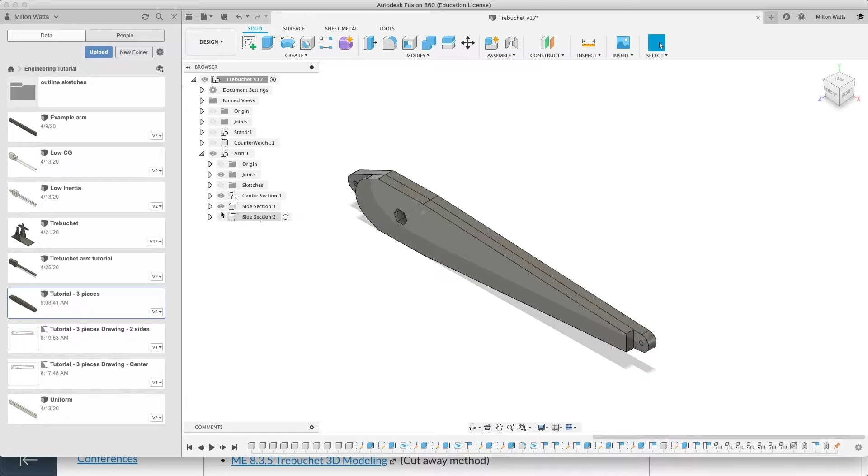In this drawing, I have 3 components, which I'll hide one at a time. I've got a center section that can be laser scribed, with all features as a single outline. On the side, there's another section, a little smaller, where some features don't go through. The third one is a repeat of the second, so I've got a center section and 2 side sections.

We're going to go through how to do that from scratch. Before I jump in, let's look at the requirements for this project. We need to fit dimensions of 10 by 1.5 by 0.75 inches.

That's 3 layers of hardboard cut from a laser scriber. There's a bearing, a 0.375 inch hex coupling nut threaded onto a 1/4 inch bolt with a little grease, which makes a wonderful bearing. We need provisions in our design for hanging the weight, attaching a sling, and a release pin, and we need to make sure all those features appear on our design.

That's all the canvas work we're going to do. The rest is in Fusion 360, which hopefully you have installed and have learned the basic features. So in this one, we're going to start clear from the beginning.

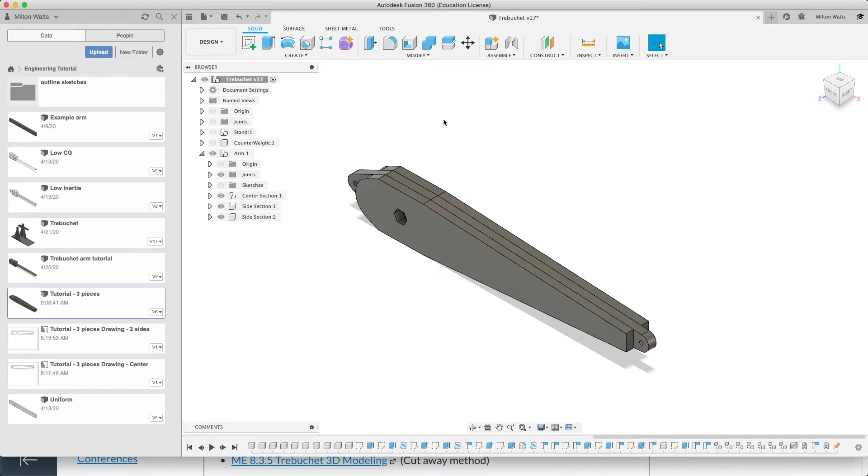We're going to create a new design. The first thing I like to do is save it and give it a name. This is a trebuchet tutorial, and since we're doing a laser cut design, I'll note that in the title.

Our design actually has 3 separate components, so we'll let the design itself be an empty parent with nothing physical in it. I'll right click with this selected and create a new component, renaming it by slowly double clicking - we'll make this the center section. Then I'll right click again to create a second component, part of the major design, which we'll call side.

So we've got a design with 2 subcomponents, center and side. We're going to start with the center, and to work on it, when you have multiple components, you have to activate the one you're working on. With that activated, we'll create a sketch.

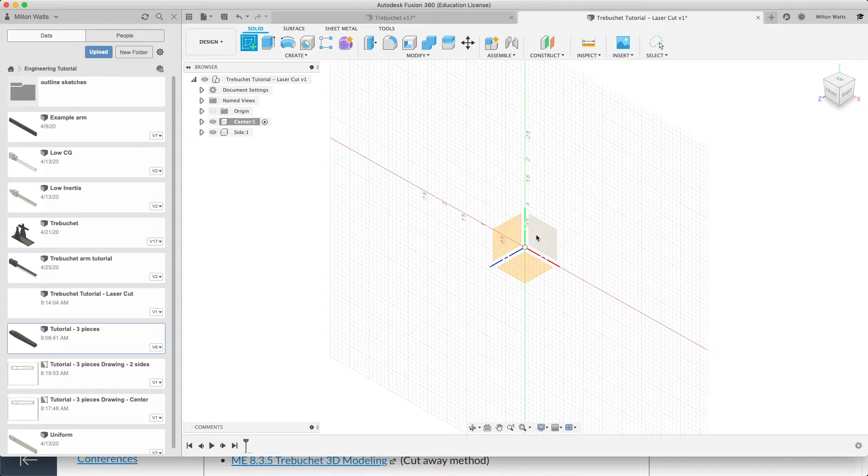We'll put that sketch on the XY plane, and work from the center out, from the pivot point outward. The reason we do that is it makes the math a lot easier when getting numbers to send back to our model.

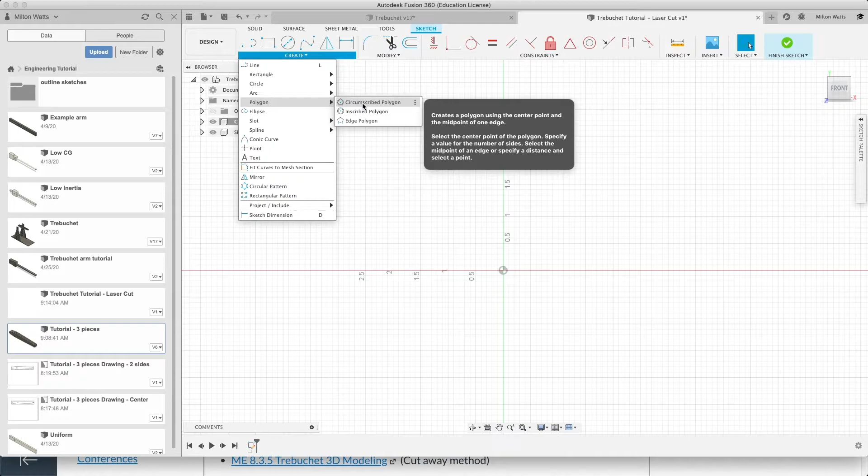So go to the Create menu. I'm going to start with the polygon right in the middle, using a circumscribed polygon - that means the dimension of your circle will be the flat dimension.

I'll click here and pull straight down so it stays horizontal on the bottom, then click. The actual size of this is 0.275. I'll use the dimensioning tool to dimension from the bottom to the top flat, and right now it's sitting at a little over 1.5 inches.

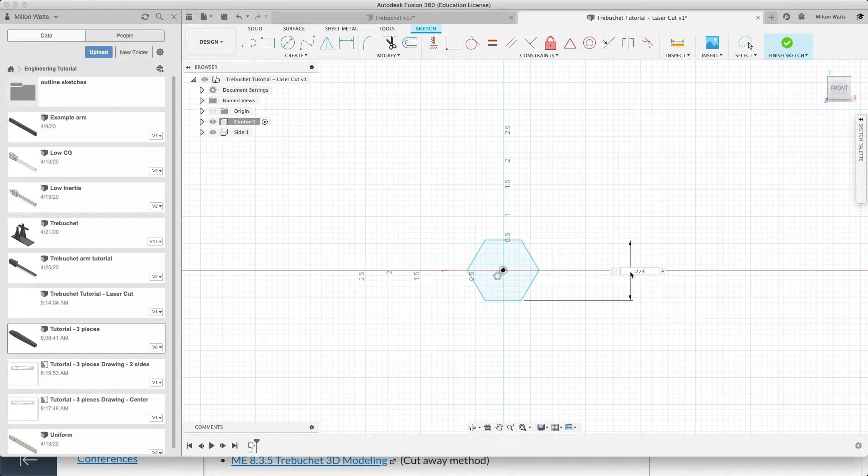The actual part is 0.275. I'm going to make it slightly smaller than that, because the laser scriber removes about 5 thousandths of material, and we want a nice snug fit. So 0.273 is the size I'm making it.

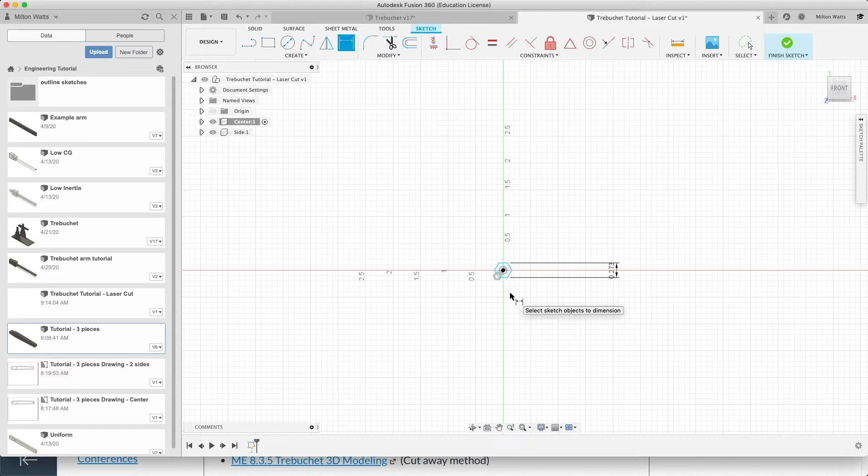By the way, if you're 3D printing that, you'd go slightly bigger because the material oozes out. Notice it's not the dark black line yet - that's because we're not fully constrained. If I select the horizontal vertical constrain tool and click on that surface, the hexagon becomes fully defined. I know its center, its size, and its orientation.

So there we go, that's done. Let's zoom out a little bit here. I'm using my touchpad to zoom out, but you can use these menu items down here as well.

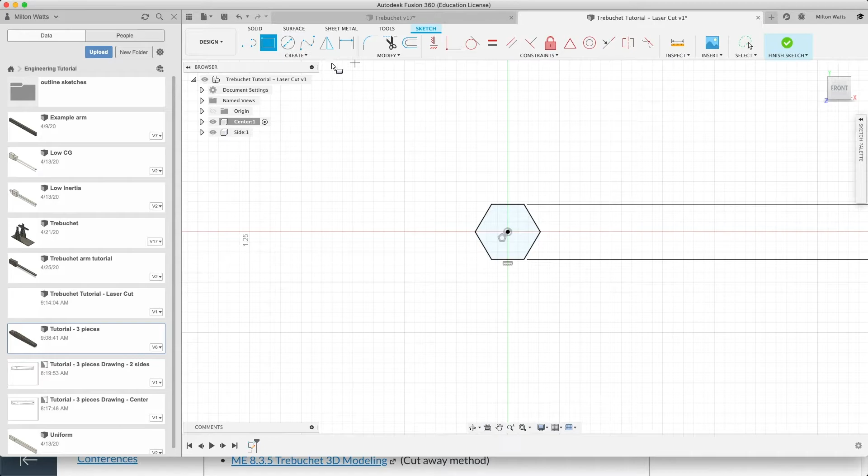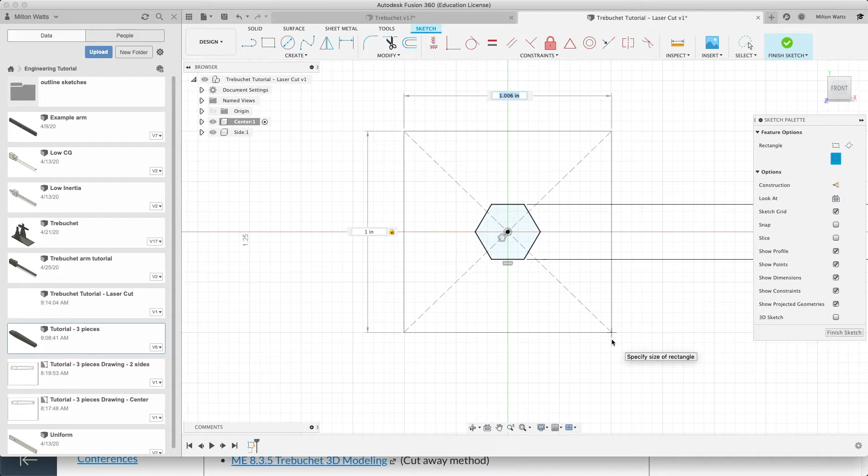Now I need to put some shape around that. I'm going to do a simple square. If I hit create rectangle, my palette gives me the option to do a center rectangle. If I click on the center and come off to the side, it creates a rectangle in both dimensions. For simplicity, I'll type 1 inch, hit tab, type 1 inch, hit return, and I have my fully dimensioned rectangle.

The rest of the design I'm going to build from this. I'll need a couple of construction lines for the rest. Zooming way out - my entire part is 10 inches long. I want a 2-inch short arm and an 8-inch long arm in this design, for a total of 10 inches.

I'm actually going to do some construction lines, and I'm going to put a line just along the axis here.

So I click in the center and draw out this way for a ways. Did that do it? No, I forgot my line tool. There we go. So I'll start on this axis and just do a big horizontal line, much longer than my part is going to be. And then I'm going to do 2 vertical lines. Hit the line tool, I'm going to put one at about 2 inches and the other one, hit escape to finish that one.

Another vertical line down here somewhere, and we'll just dimension, put those exactly where we want. Dimension tool, click from this line to the middle, and that one's showing at 7.5. We'll make it 8 exactly, and we'll dimension from this line to the middle and make that 2 exactly. Now I'm going to zoom extent here and hide my sketch palette, or move my sketch palette.

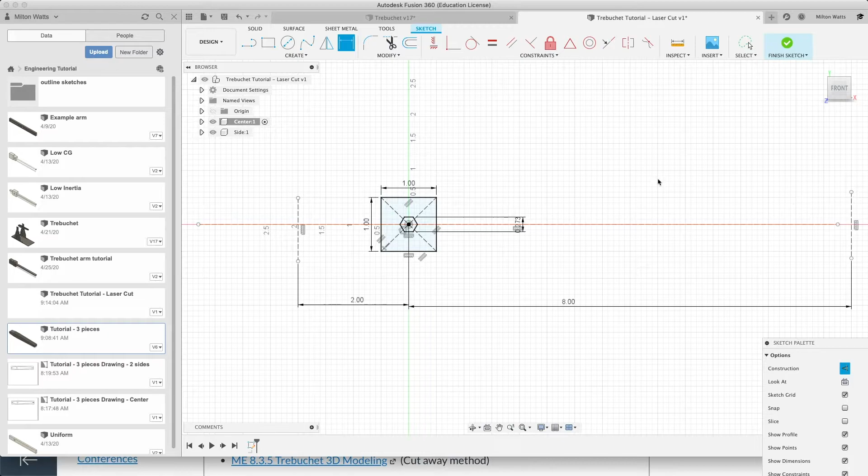There we go, we can see the whole part. It's going to fit within that area. All right, so now we've got that dimensioned. We can start filling in this space here.

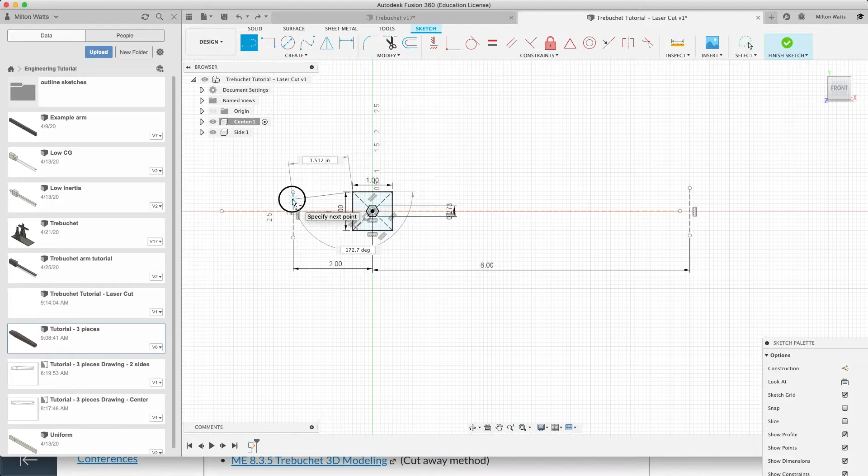Let's just make a very simple trapezoid, so 3 lines. So if I create a, just take the line tool, go from here, come out over here somewhere a little bit below the horizontal, over here and over here. That created all but the end line. Let me make that end line. Okay, and it's thinking about it, and there we go. We've got these three lines.

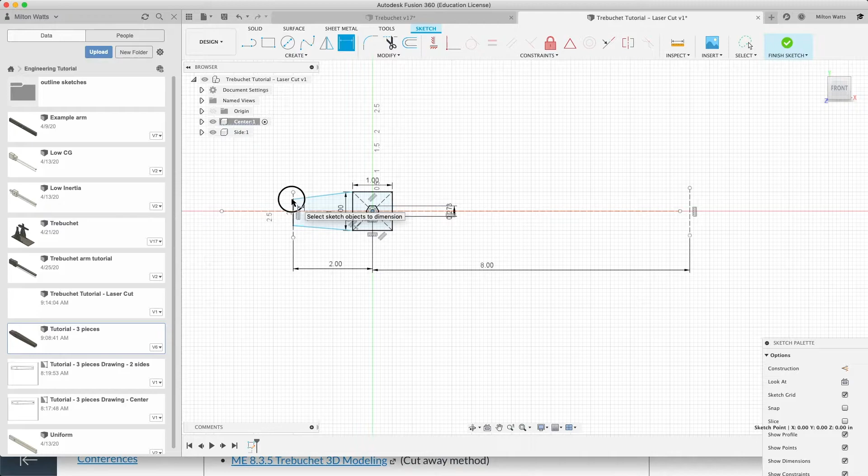These aren't fully dimensioned, it'd be nice to give them some angle, so let's measure this point relative to that point in the vertical direction. So I'm going to come in with the dimension tool, come from here to, oops, I clicked wrong, to that point, and to the origin. No, it really doesn't want to dimension that for me. There we go, 2 inches.

So I don't want to measure 2 inches that direction, I want to measure the height. So I get down here between them and click that. Let's make that a 1/4 inch.

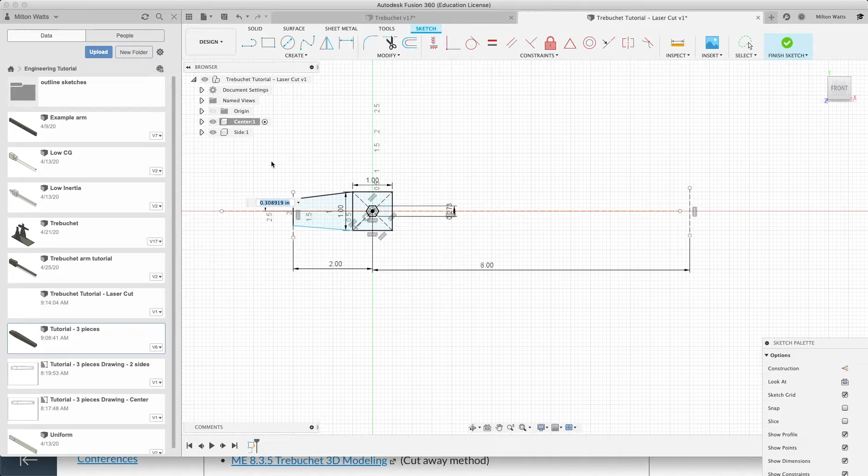And then do the same thing here, measure from that point to the origin and come in here. Sometimes it fights you on doing that. If you right click, you can actually force that to be a vertical dimension. And it's at 0.309, let's say change that to 0.25. There we go, now we've got this fun little trapezoid shape, and it's fully dimensioned.

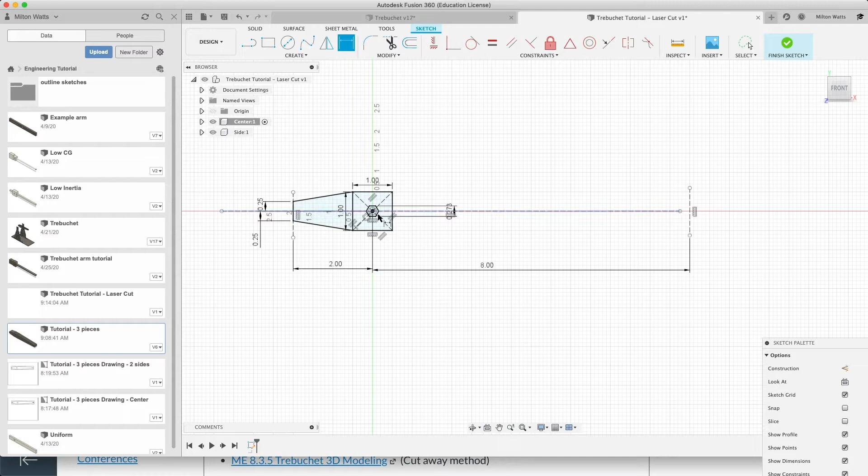At this end, we need some sort of hole, so I'm going to zoom in. That was a little too much. Pan across, and maybe somewhere in here we need a circle, so I'll come in, click on that line. I found that about 1/8 of an inch is good, so I'm going to make this hole 0.125 for threading things like wires through. That's just sitting on that point.

Don't know how far it is from here or here. Let's measure from here, put it maybe 1/2 inch in. So the dimension tool, measure the center of the circle out to the back of the part. Cancel, the center of the circle to the back of the part. And there we go, it's sitting at 0.187.

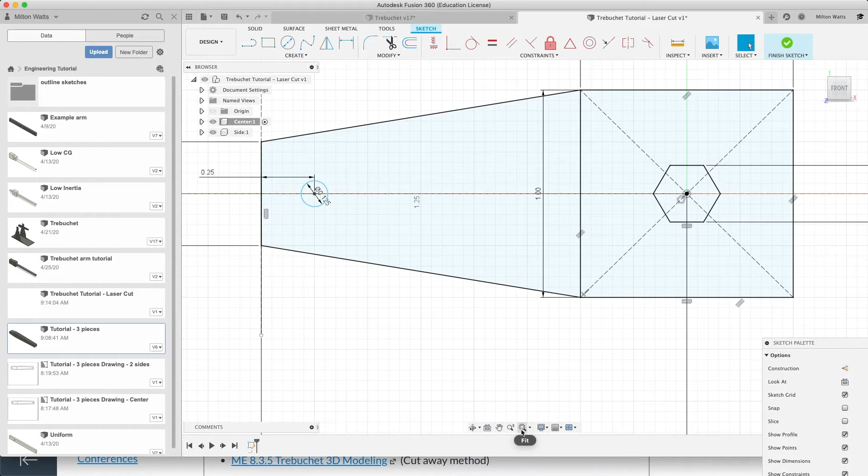Let's put that in maybe 1/4 of an inch, so that we're still here where it's pretty beefy. Okay, we'll call that done for that end. Let's zoom the extent here, zoom to fit so we can see this end, and then zoom in over here.

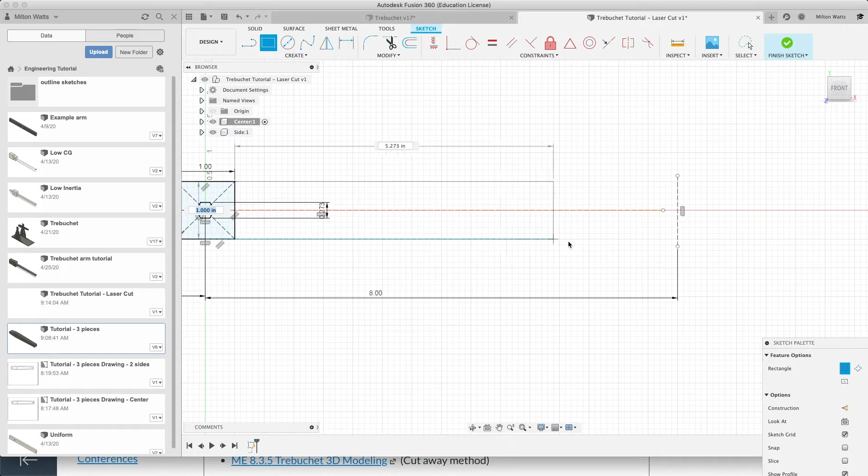Now we need to be able to see the... For this side, I think I'm going to make it a little bit simpler. We're just going to go with a pure rectangle, just a 2-point rectangle. Come to this top left, top right corner, and then come down here. I want to be exactly that height, and then we'll come over till we hit that line. And there's a nice simple rectangle that is the correct dimensions, 8 inches.

This line here didn't register on that point, so I'm going to hit the dimension tool, measure from here to here, and let's confirm that that's 1 inch, and that's fully dimensioned.

Now we need 2 more features. We need a hole at this end somewhere. I'm going to go ahead and drag this point out off my part. And I need a hole down here, and then I need some way to attach the release pin. First, let's do the hole.

So I'll come in here, maybe about a 1/2 inch from the end, draw that same 0.125 hole. Let's dimension it 1/2 inch in, maybe. That didn't work. 0.5, enter, there we go.

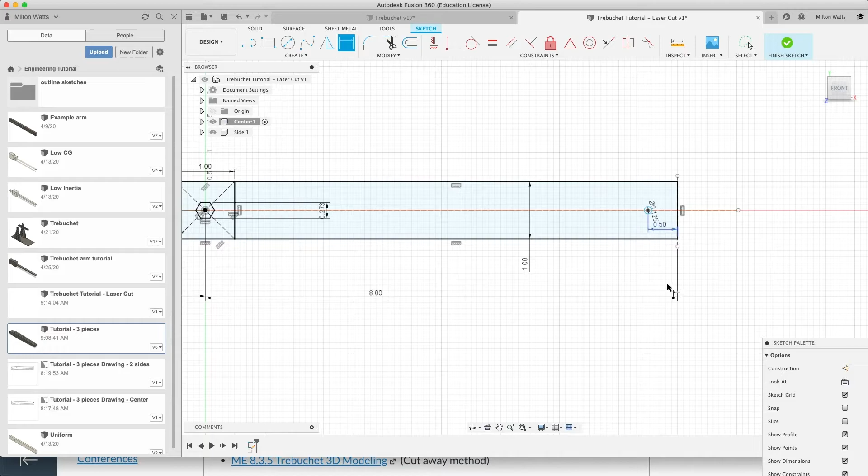And then I'm going to zoom in here, I need a little bit more. I need to put a feature where I can put a pin out here along this line. And I think the easiest way to do that is to just cut a slot in here that's the right height. And it will be thicker than I need it, but I think it'll work if we stick some glue in there. So to do that, I'm going to create another circle.

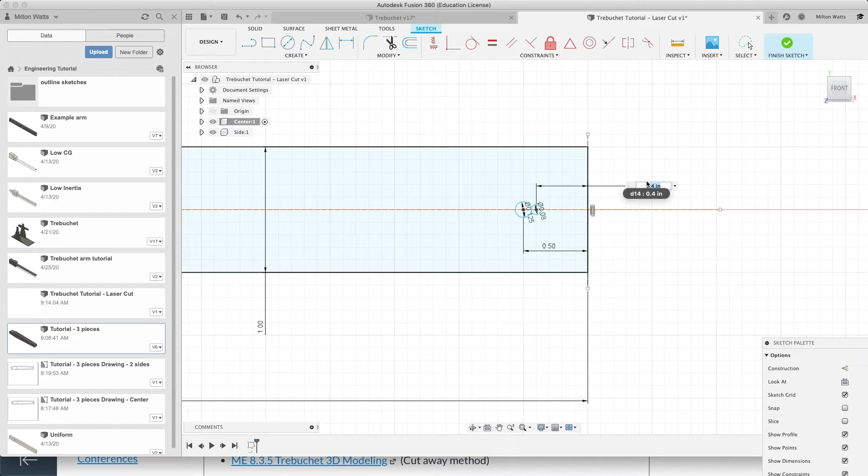This pin is about 80 thousandths, so 0.08 inches. We'll dimension this one from the end. I'd like to go pretty close to that other hole, so let's go 0.4 inches. Maybe not quite that far, so 0.375. There we go, so those won't quite intersect.

So we'll come in there, and now zoom in very closely so I can see what I'm doing. I want to draw a line from the top of that over to here. So the height will be 0.08.

Maybe if I just, well, let's just try it here. Let's draw a line from here over to there. There are two ways I can connect. I can connect on it, which gives me the X, or I can connect tangent to it, which gives me that dimension. And then I can move this line until it's horizontal.

I think if I just take that line and constrain it horizontal, there we go, that line is in position. And I can do the same thing down here now. Come from here, anywhere, catch the tangent, and then go horizontal with this line. And now I've got that nice little slot.

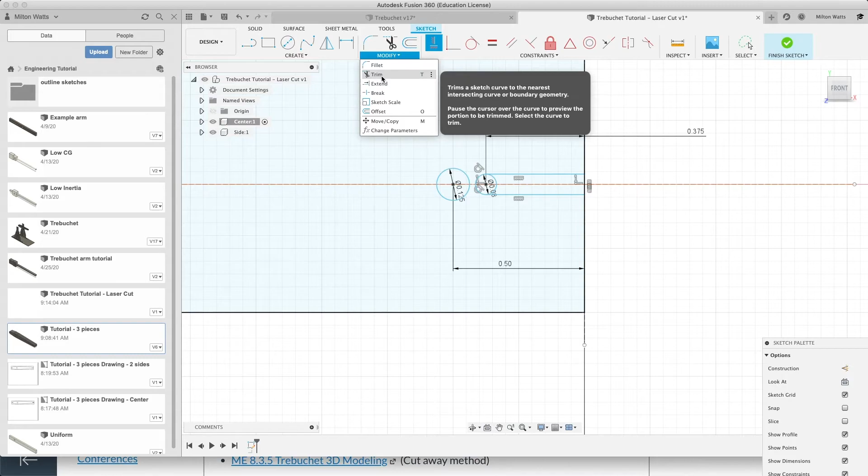This piece of the rectangle's in the way. I'm going to use my trim tool to just cut that out. I had to cut it in two pieces because of that construction line. But now it's kind of hard to see. Oh, I need to trim that half of the circle out as well.

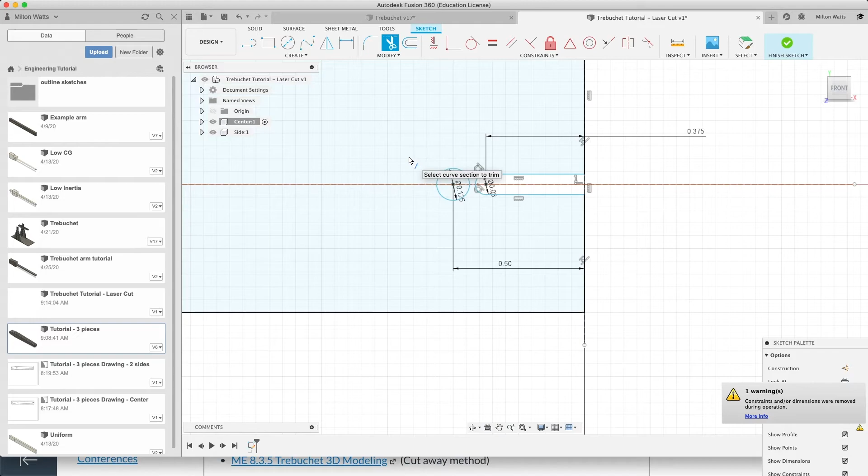So now I've got the outline of the part creating this little channel, which will be good for my release pin to fit in. It's not fully dimensioned, and I don't really care at this point. We're going to go ahead and create this part. It will create - you should take the time to fully dimension everything.

But we're going to finish the sketch. Going to angle it just a little bit so we can see what's going on as we do the next operation. We're going to create an extrusion. We need to select a profile.

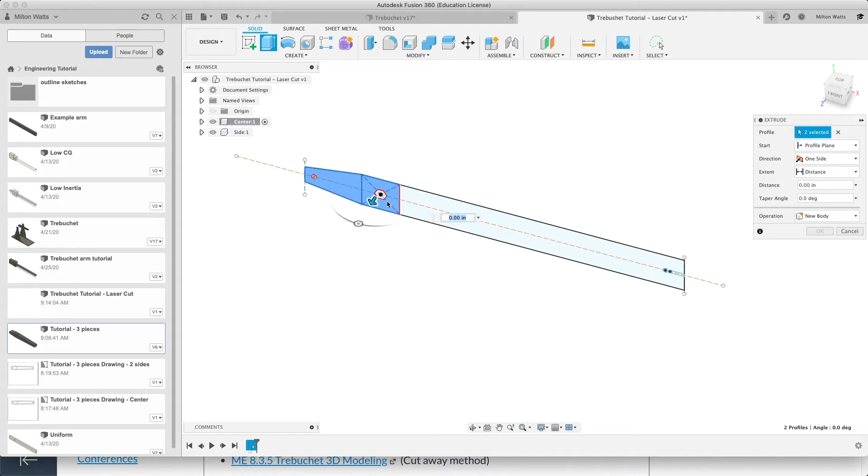We need this part, and you see it didn't catch that hole. We need that square - it didn't catch the hole. We need this blade. You can see it's got the cut in it and the hole there. That's what we need to move.

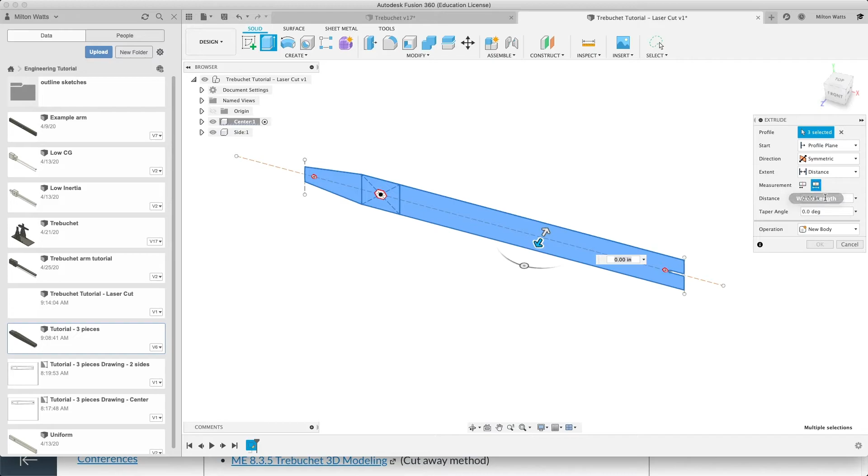This time we want this symmetric around the XY plane, so we're going to use the symmetric extrusion and go use a distance, but we're going to type in the whole distance, the whole thickness of our part, which is 0.25 because that's the material we're using. And you can see it created part on both sides of the axis.

And that's exactly what we wanted to do, create the new body. We now have our first part. Okay, the next part we're going to do...

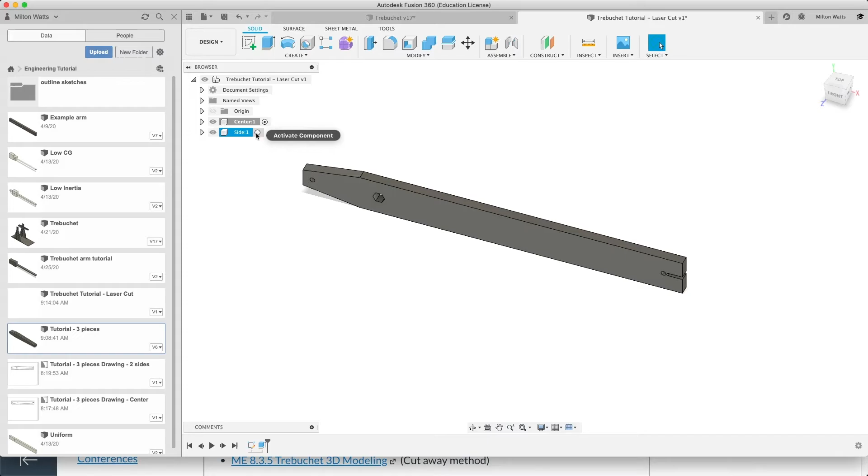We need to activate the sides, and we're going to build this side off of this part so that it mates to it and everything's aligned. So I just click on the surface of that part, creating a new sketch. And there's our sketch.

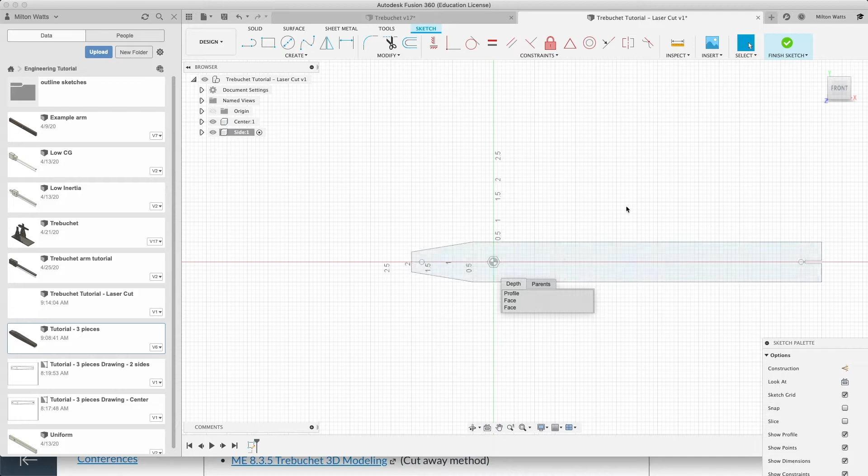Notice it copied everything. Well, we want this part to be a little bit different. For example, I'm going to put a circle in here. So let's create a circle tangent on two lines, 1, 2, and then I'm just going to move that circle up until it is no longer intersecting that hole where my weight may be. And that will be the new end of my part.

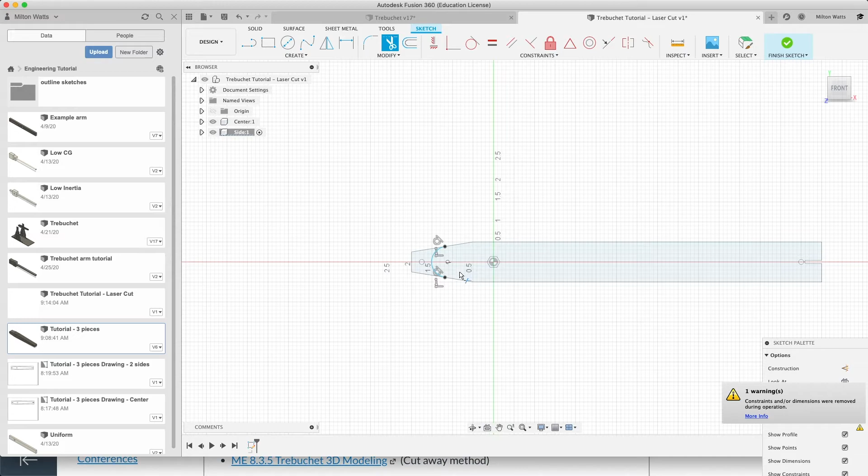So I'm going to have to take these two lines and trim them away, modify trim. By the way, all of these lines came in, but they don't really work, so we're going to have to recreate those. I can't trim them yet, so let's go ahead and - well, we can trim this side away. Good, we've got that tangent circle.

And now we can just start drawing the rest of the parts using the line tool. So I can come to this point, snap on that point, snap on this point. Oh, it didn't draw that line. Let's come back, and now we come to this point.

We're going to draw all the way through so that we create sidewalls for that hole. Click on this point again, come down to here, click on this point again, come down to there. We now have a whole outline of the shape.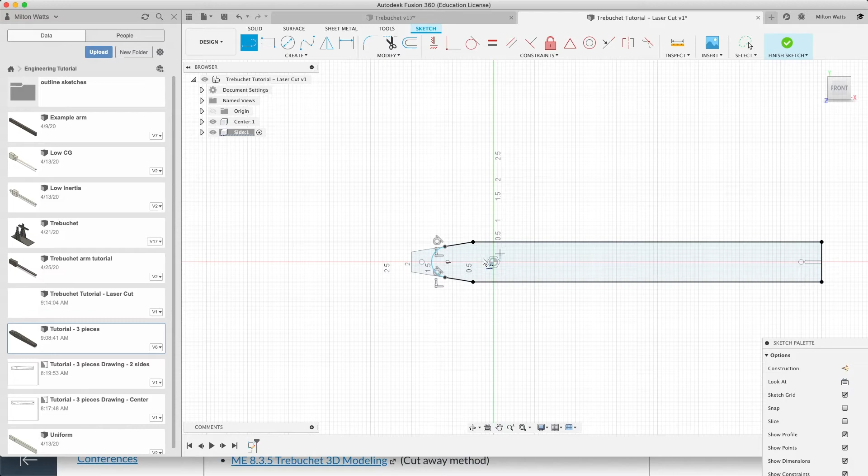We need to put some features in. We need to have that same hex hole and this same through hole. So let's zoom in quickly. I can create the hex hole by tracing it, or more easily just draw another polygon.

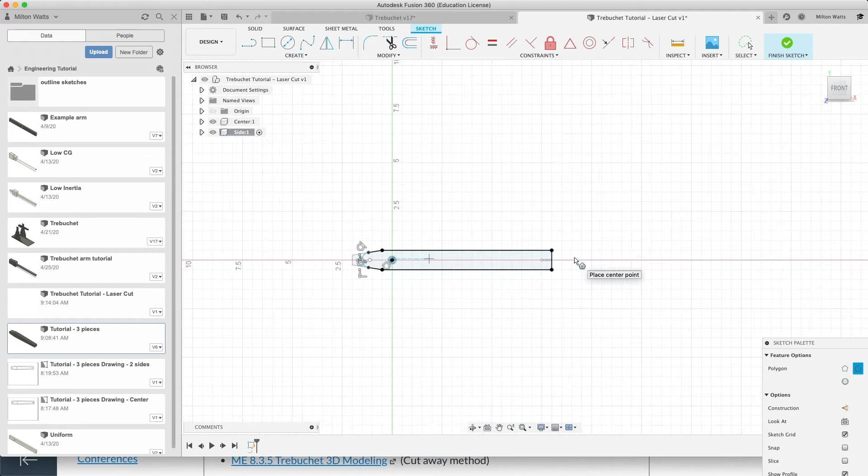Circumscribed, I click on the center and I click on the side. That one's done. I come over here, create my hole. Click on the center, click on the side. That one's done, and finish the sketch. Pretty quick when many of your features are referenced off the other.

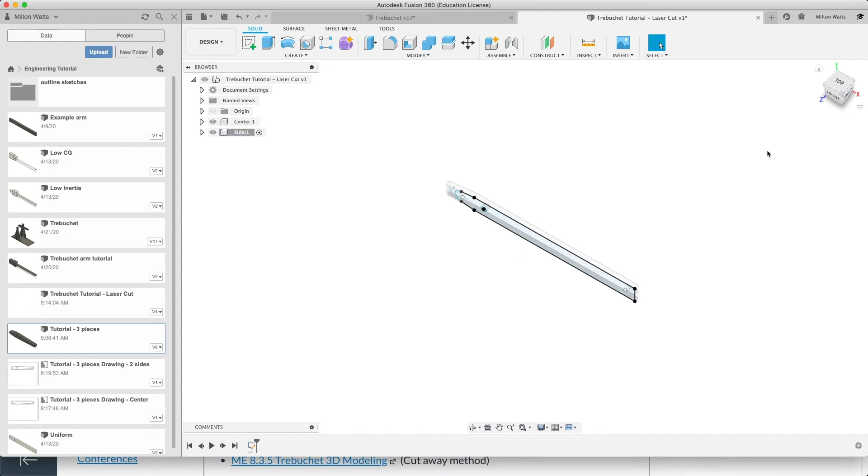So that part is ready for extrusion. I'm going to swing it out here so we can see. May barely be able to see the outline of the original part. Now we're going to extrude this piece off towards me, so that will be an extrusion.

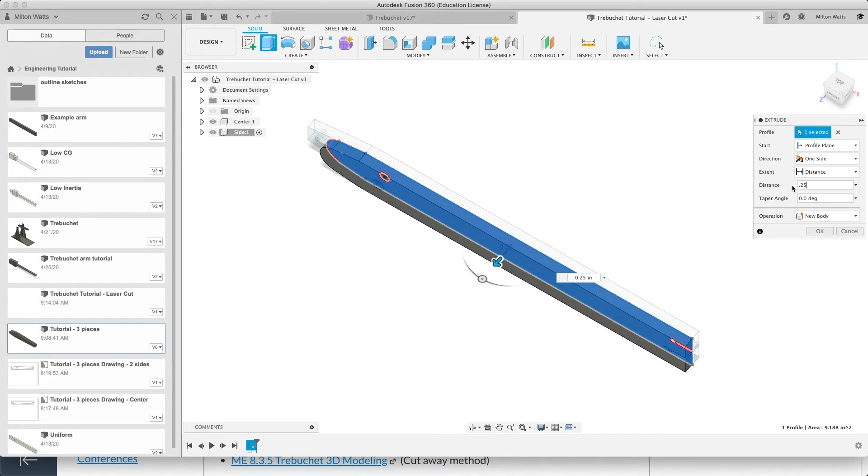I select this face and I'm going to do one-sided, a distance of 0.25, and hit OK. That is done.

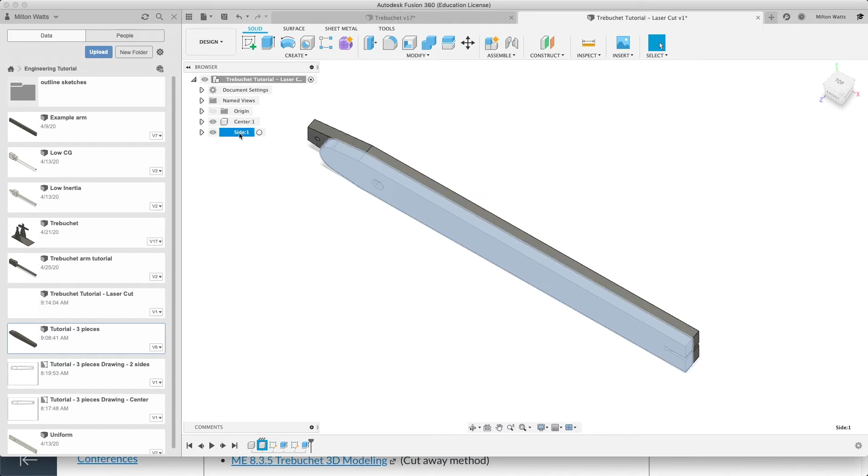I want mine to be symmetric, so I'm going to make a second copy of that and put it over on this side. We don't want the copy to be within the part, we want it on this side. So we activate the top level, then come down to this, right-click, and move or copy this part.

Now we can type in a Z distance. If I type 0.5, it moves it away from the part. I actually want to make it on the other side of the part, so I'm going to go minus 0.5.

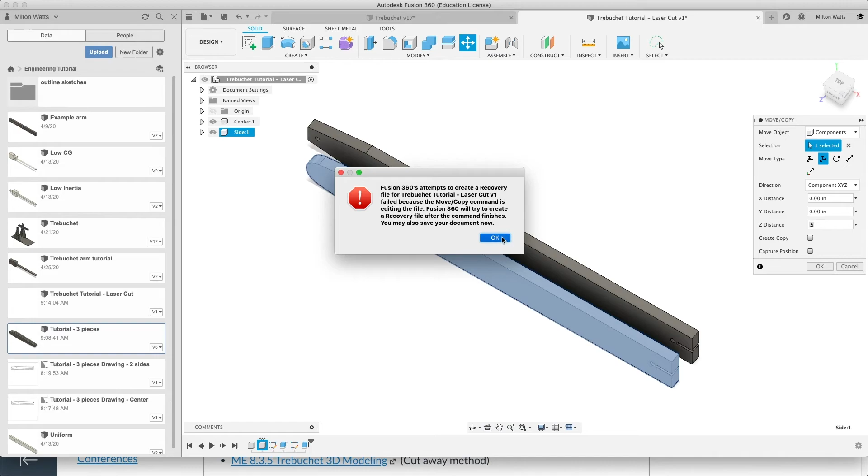Minus 0.5. But I want to leave the original so that I have both of them. So I create a copy, minus 0.5 in the Z direction, and click OK. Now you can see we have a center, a front side, a back side. These two are identical. We can hide them one at a time if we choose.

But that's our part, and we're ready to go. Two things left to do. One, we can figure out all of the physical properties of this part.

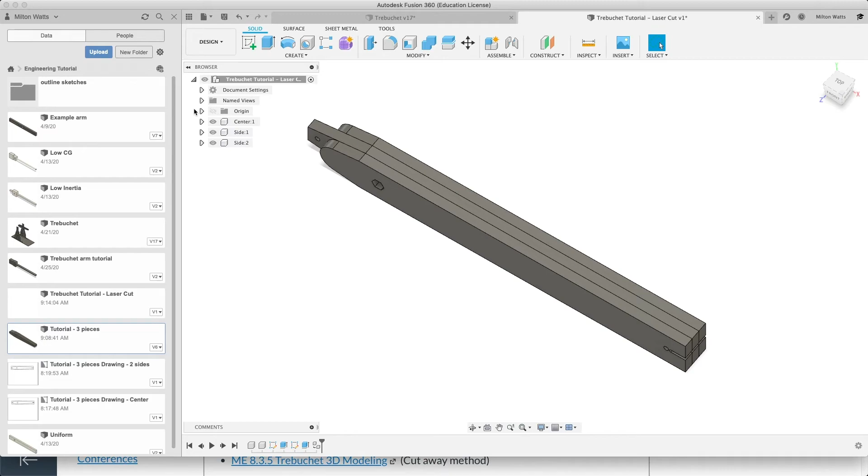We do that by coming up to the parent that contains all of it and down to properties. Gives me a list of things. The volume of this is 7 inches cubed. That's pretty big, we may want to trim that down.

Maybe we could pocket these outsides or something. We're not going to take the time here, but also we can find the center of mass.

Right here, the center of mass is 3.2 inches in the X direction. That would be from here, 3.2 inches down. Because everything else is symmetric, the center of mass in Y and Z, or Z and Y, is 0. We can also look and read the moment of inertia.

So I like to copy these values to the clipboard and then paste them into the spreadsheet. We'll save that for another time.

Okay, last thing we need to do is create some output. For output, we need to have drawings of the different sides. We only have 2 really different sides. Let's click on the center one, activate it, right click, and we're going to create a drawing.

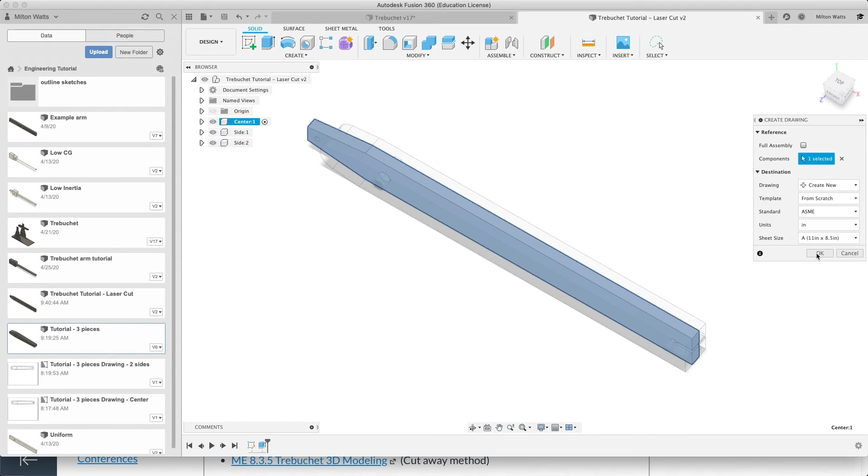And we'll just do a nice 11 by 8, that should fit our part on it just fine. Hit OK, and it takes a while for it to figure out what it needs when it creates this new drawing. The menu has changed up here.

Now we're going to place our part. It came in with a scale of 1 to 4, but we actually need this to be a scale of 1 to 1. Then we can put this over there, and you can see that it fits. That's great, we've got our 10-inch arm here. And we hit OK.

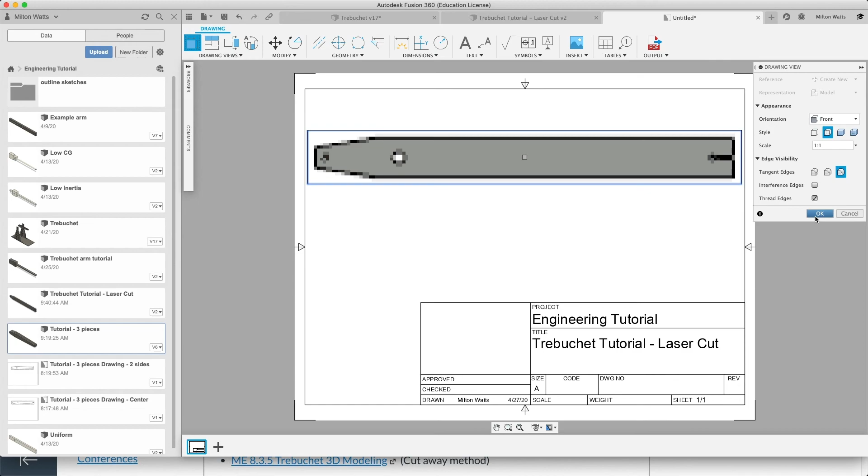So we've got that in there. We don't need all of this other stuff, so we can delete those 2 things. This drawing is done. We can hit save. That little asterisk goes away.

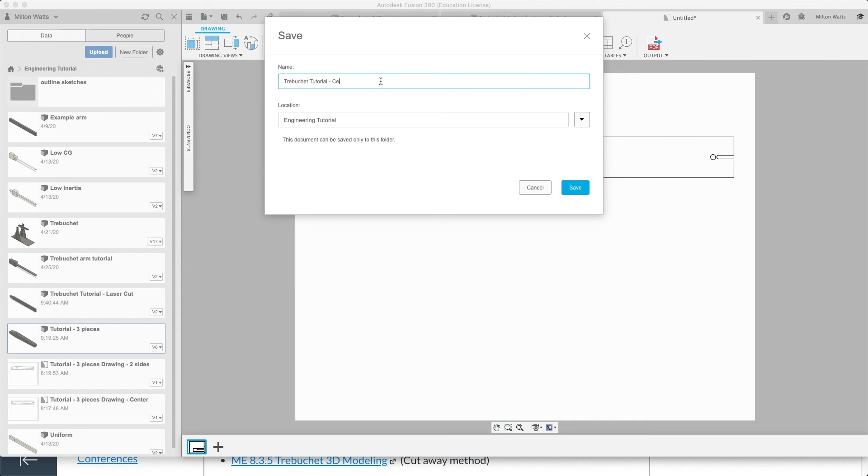We need to give it a name. LaserCut drawing - let me back this up and rename it. This is just the center, we only need 1 of these.

So there's the centerpiece. We're going to output now a DXF file, a drawing interchange format file that AutoCAD created a long time ago, and my laser cutting software knows how to read this. So this is the Trebuchet Tutorial Center, version 1, sheet 1.

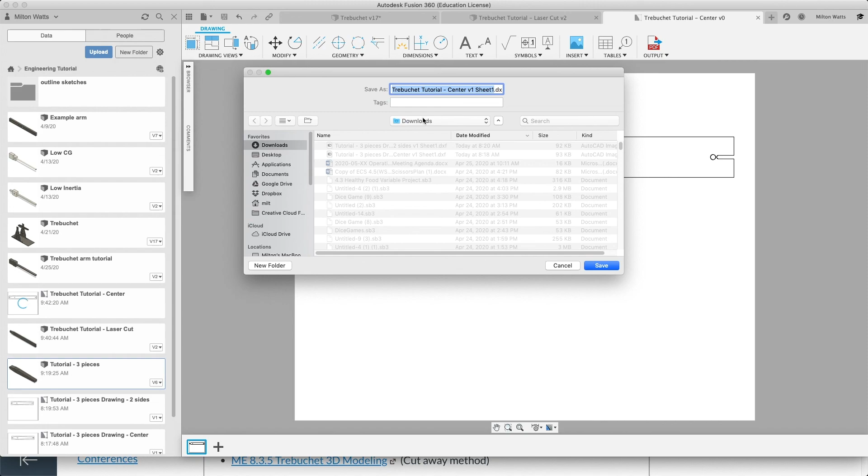I'm just going to leave that. I'm going to put it to my downloads folder, just because I don't need to save that drawing, but I do need to submit it to Canvas.

We would then come down and do exactly the same thing for the side, for one side. Activate it, right click, new drawing, or create a drawing. I will not go through that in interest of time. It's the same process, that needs to be submitted as well.

If you label that side, then I will create 2 of the sides and 1 in the center. Hopefully it'll be obvious to me when I get them. If you give me just 1, you'll get 3 identical copies. If you give me 2 drawings, I'll make 2 of whatever I can figure out as the side. If you give 3 drawings, you'll get 1 of each of those.

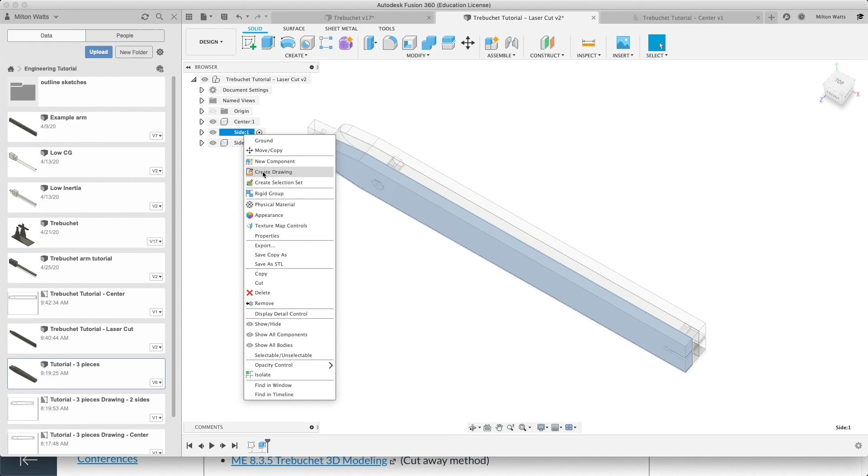So there's the end of the tutorial. Hope you understood it, and I look forward to seeing what you come up with. See you next time.